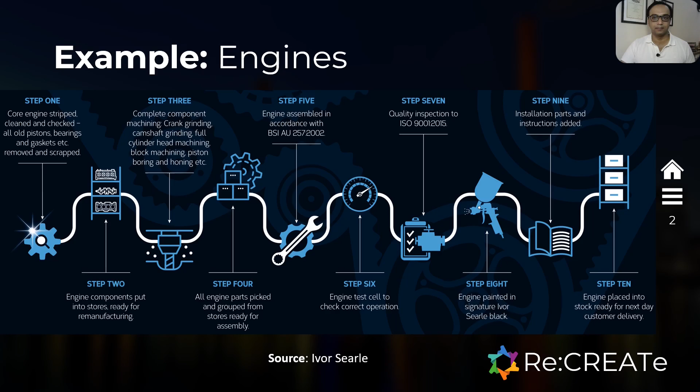So if we were to look at the remanufacturing process in a more general way, it starts with procuring the product to be remanufactured, which is reverse logistics, followed by disassembly, inspection, repairing or replacing or upgrading of parts, the reassembly process, finishing, and quality testing before it re-enters the supply chain. It's also worth noting here that the product doesn't necessarily have to go back to the original user, but could be sold back to anyone in the market.

Another important point to note is that remanufactured products are sold with a warranty that is equivalent to a new product and often cost 40 to 60% less than what a new product would cost.

So where does remanufacturing fit into the economy? Let's start by talking about the traditional linear economic model a little, in which there is, conceptually speaking at least, a linear flow of materials from raw material extraction to production to usage and ultimately to disposal. In reality, that's not the case in an absolute sense because many products go through multiple life cycles through reuse and repair, even if they were not intentionally designed that way.

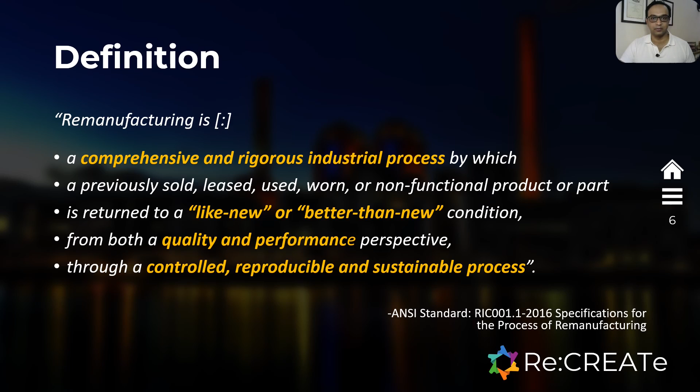Now that we've talked about what remanufacturing is, we can sharpen the focus of our understanding by contrasting it against what it isn't. When talking about the circular economy, there are many words that are used, ranging from reuse, repair, recycling, refurbishing, reconditioning to remanufacturing. Part of the challenge here is that these words get jumbled together and end up getting used interchangeably, which simply isn't accurate. Just quickly talking about a couple of these.

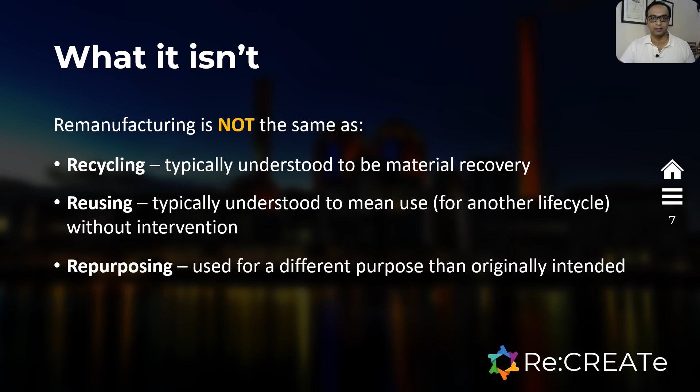Recycling means material recovery. That's it. It doesn't take into account the form or shape or function of a product or part. It's simply about recovering something which then gets broken down, possibly to its constituent molecules or compounds, and then gets reconstituted back into a different product or part altogether.

Refurbishing and reconditioning perhaps come closest to remanufacturing, but they do not carry the same rigor as remanufacturing. And what you get as a final outcome through either of these processes is very dependent on the interpretation of who's doing the refurbishing or reconditioning and what that means to them.

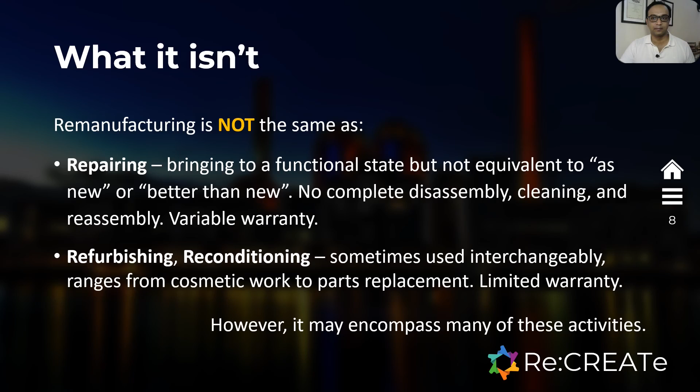Now, for something to be remanufacturable, certain criteria need to be met. This list is from research conducted by Boston University. It isn't an exhaustive list, but outlines some parameters that need to be considered and met at, say, the product and the market level for remanufacturing to be a self-sustaining industry.

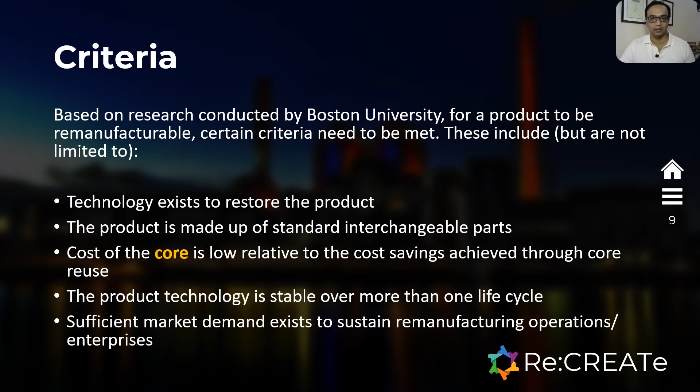The specific technologies, methods, and market conditions will vary from industry to industry and perhaps from product to product within the same industry. What can be said is that economies of scale will play an important role, along with the efficacy of reverse logistics networks and product design.

You've already heard me use the term core a few times here. This is the formal definition of a core based on the same ANSI standard. In essence, a core is a product or component that is ready to be remanufactured. It's critical to develop reverse logistics systems that can handle the core with care to ensure that maximum value can be retained. A core is absolutely not the same as scrap.

At the policy level, this definition and various others in relation to waste categorizations will become important to ensure that cores don't fall under those same definitions and categorizations of waste or materials to be harvested for recycling.

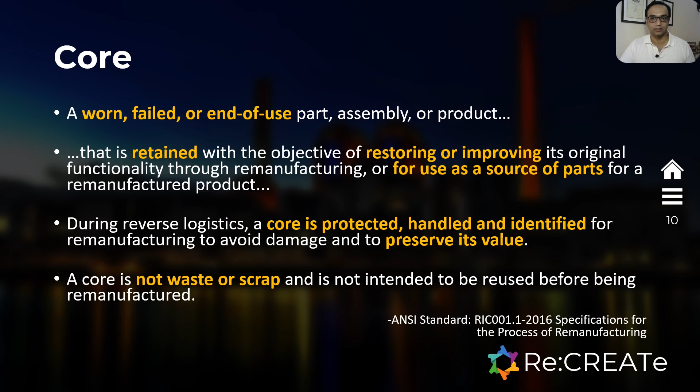Given where the Indian economy is, the job creation potential needs to be underscored here, as well as how remanufacturing can tie into the country's sustainability, resource conservation, and resource efficiency aspirations.

Not too long ago, a report that was published by the International Resource Panel, which is a global science policy platform established by UNEP, estimated that about 79 to 99% reduction in greenhouse gas emissions can be achieved through the remanufacturing of a component compared to a newly manufactured component. The same report also said that an average reduction of 80 to 98% can be achieved in the use of raw materials when remanufacturing industrial equipment compared to producing it new.

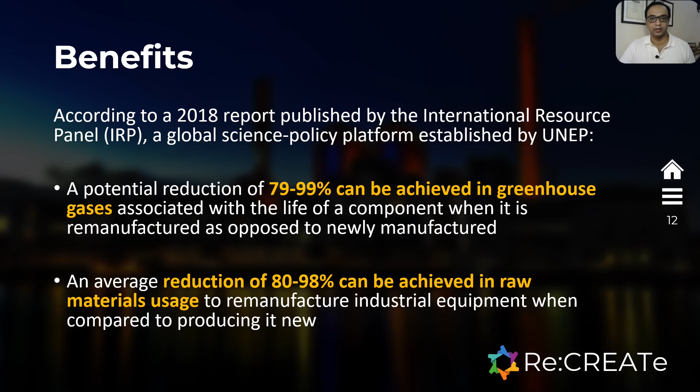Additionally, a 2018 study by the International Labour Organization estimated that by 2030, 24 million new jobs could be created globally if the appropriate policies are established to promote a greener economy. And of those 24 million jobs, 6 million jobs could be created by transitioning to a circular economy, which includes remanufacturing.

I agree that these estimations need to be taken with a grain of salt. The projections are obviously dependent on the methodology used and the assumptions made to arrive at the estimates. However, they are not insubstantial either in terms of numbers, and perhaps it's worth looking at them as aspirational.

I wanted to go over one more example in relation to remanufacturing, and this is pertinent to the growing industry of electric mobility in India and around the world. Over the last few years, in India alone, several government-led initiatives have been announced to advance electric mobility, such as the National Electric Mobility Mission Plan 2020, the Faster Adoption and Manufacturing of Hybrid and Electric Vehicles scheme, or the FAME India scheme, and the Phased Manufacturing Program for electric mobility put out by the Department of Heavy Industry in 2019.

Electric vehicles are typically powered by lithium-ion batteries, and electric vehicle batteries, or EVBs, get replaced when their capacity reduces to 80% or below of the original capacity. When EVBs reach the end of the use phase of their life cycle, there are at least 4 options in terms of end of life or end of use options. Disposal is the least preferred, but may be necessary if the battery is damaged beyond recovery or repair, and even material recovery is impossible, say in the case of a fire.

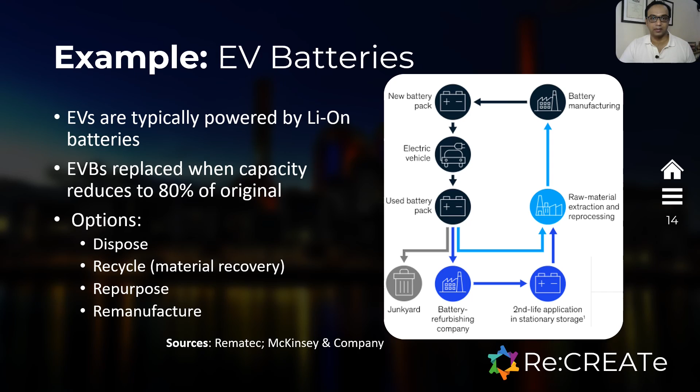So to ensure that the batteries meet the use requirements, they tend to be over-engineered. And as a result, by replacing even one cell, the weakest cell, the overall battery capacity can go back up into the range that is appropriate for use in electric vehicles, as opposed to, say, repurposing. And obviously, from a cost and resource extraction and use perspective, the implications can be quite significant.

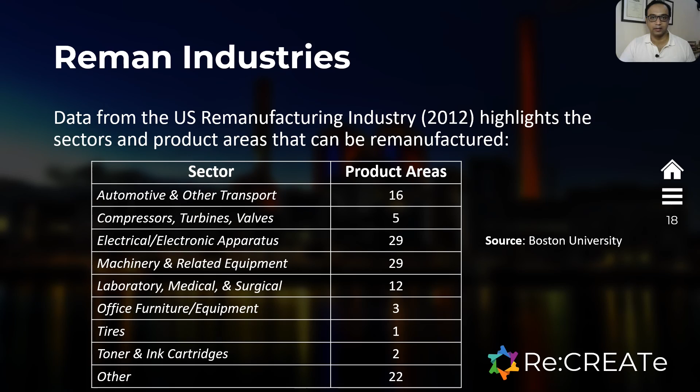The data on this slide is a little bit old, but it gives a sense of the industries and the number of product areas in each industry in which remanufacturing occurs. As you can see, the industries range from automotive to electrical and electronic products to medical equipment and office furniture. My sense is that globally the numbers are probably higher today and probably include more industries and product categories than are listed here.

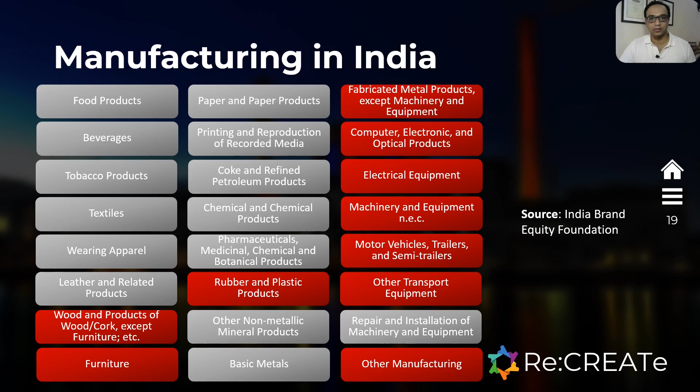So we're almost at the end of my presentation. This slide provides a high-level view of manufacturing in India, ranging from food production to pharmaceutical manufacturing to motor vehicles. What I've done is highlighted in red the industries that already undertake remanufacturing or have the greatest potential to do so. Of particular note is the mobility or transportation industry, the electronics manufacturing industry, which recently received support to boost mobile phone manufacturing in India, as well as medical device and medical equipment manufacturing, which is categorized under other manufacturing at the bottom right-hand corner of column 3, especially given where we are with the pandemic.

The last thought that I want to leave you with is that design is fundamental to the greater adoption of not just remanufacturing, but the overall transition to circularity in any economy. And we're not just talking about product design. The design of the systems, the business models, the broader environment of stakeholders matter a lot. Inculcating life cycle thinking in every aspect is critical, as well as the alignment of incentives and infrastructure, bringing greater awareness to markets and engaging stakeholders across the spectrum.